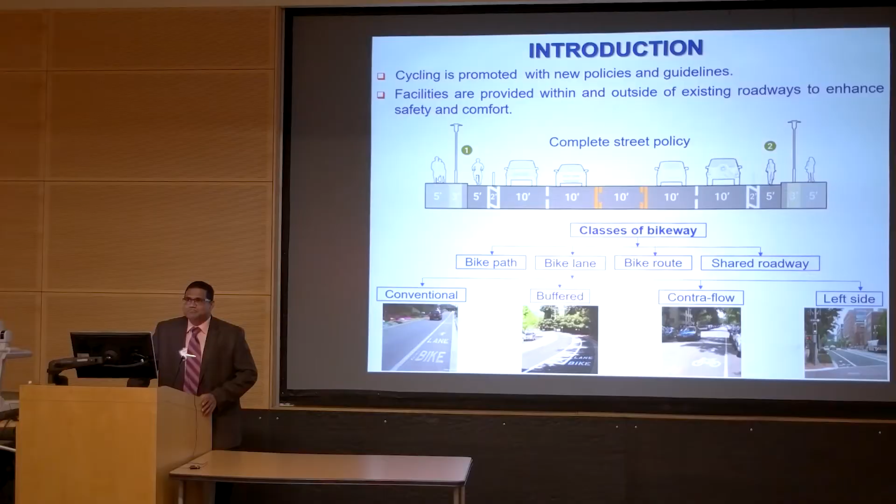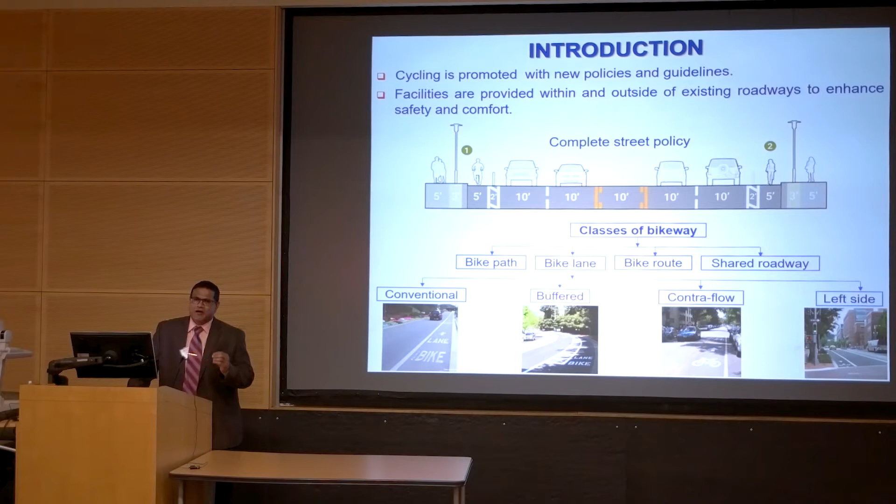The other option is to have a separate bike path. In that case, we have a little more flexibility in designing the roadway width, the curve, the transition curve, and slopes, all to control the stability of the bicycle and also improve the rider comfort. That's actually the focus of our work: to evaluate the impact of roadway design parameters on bicycle stability and the comfort of the rider.

Right now, if we look at how people are evaluating this, they do surveys, they take video recordings to understand how bicycle riders are responding to different obstacles, different curves, or roadway design parameters, as well as how drivers are responding to the bicycle. These are great tools, but they need a lot of resources.

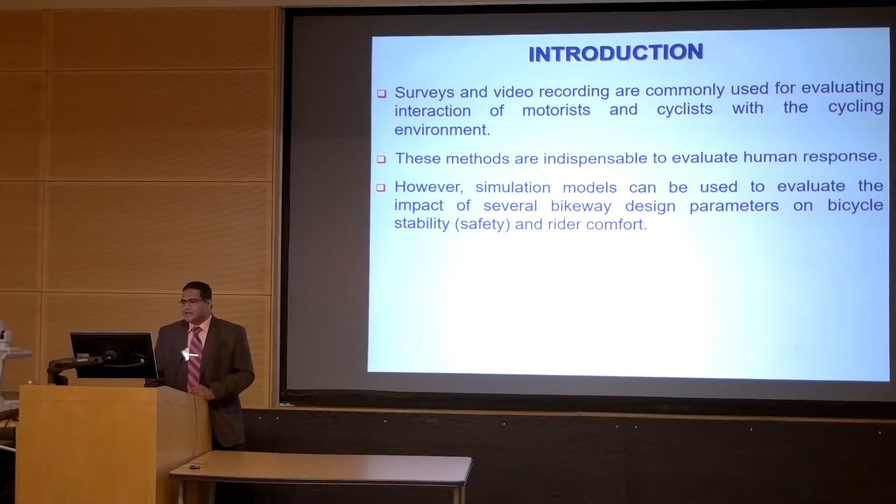So our thinking was: can we develop computer simulation models to get a bicycle traveling along a predefined path, and try to understand what forces develop in the system and how to make the bicycle stable? What is the stable velocity for a given road configuration? As you go from a straight roadway into a curve, what forces develop and how do they make the rider comfortable or uncomfortable? That's the focus.

This idea came up mainly because I worked with Dr. Kyle several years ago developing vehicle models. We developed complete vehicle models like Hummers, flatbed trailers, and semi trailers. I was developing the model, and Dr. Kyle, who is an expert in vehicle dynamics, was simulating these vehicles on different road profiles to understand their stability.

As you drive around a curve, what is the minimum curve that will cause the wheels to lift? We were also doing durability studies, running vehicles on different road surface conditions to understand the stresses and strains developed in components, to find out how long these components would survive under these road conditions.

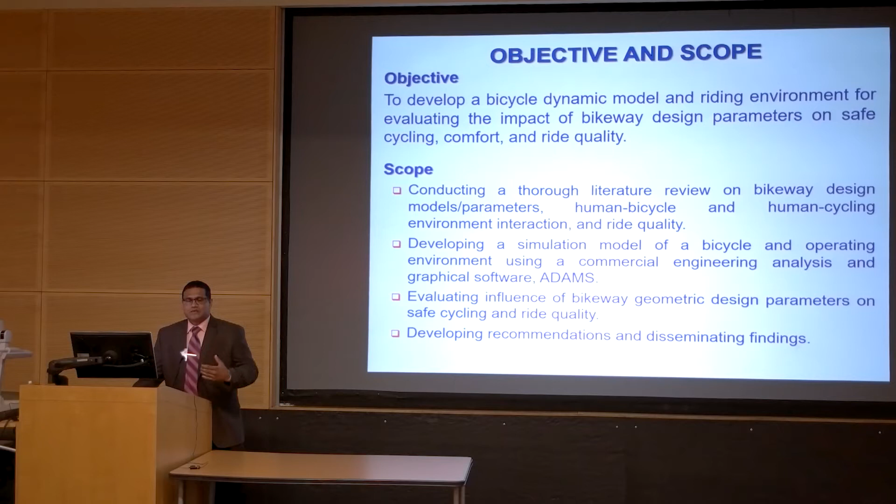With that background, we thought: why can't we develop a bicycle model and evaluate the impact of design parameters on the stability and comfort of the ride? We did a thorough literature review to understand the state of practice and state of the art, then worked with specific software to develop the bicycle model. We evaluated the impact of these parameters on stability and rider comfort, and based on that, we are proposing recommendations to move forward with this research.

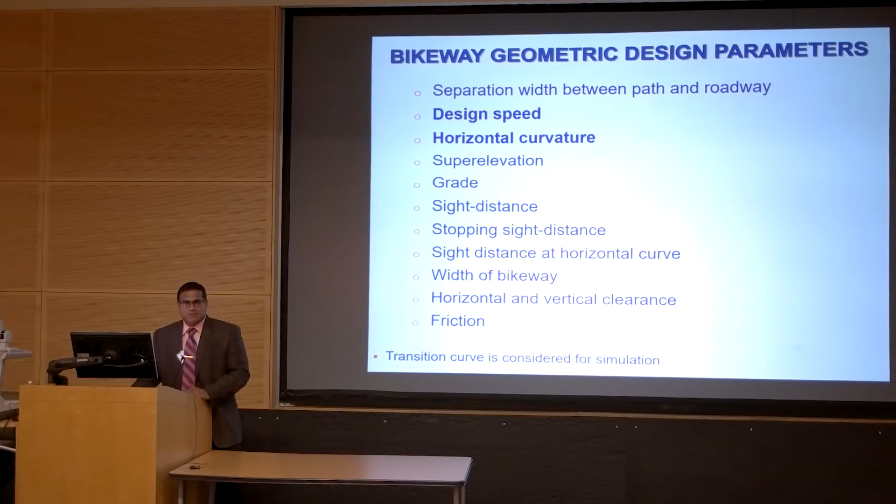There are many different parameters to consider for bike path or bikeway design. For this study, we looked at design speed, horizontal curve radius or curvature, possibly including friction, and also the impact of transition curves—as we enter the main curve, how we can use the transition curve to minimize forces and discomfort.

If you look at someone riding a bicycle on a horizontal surface with a curve, it develops several forces. One is the body weight plus bicycle weight acting toward the ground. Another force is the centrifugal force that acts outward from the curve, normally toward the center of gravity. In addition, forces develop at the road and bicycle tire interface—you have a normal force and a friction force. Combined, these produce a resultant force that passes through the center of gravity.

So those who have done basic statics will know that if we have three forces that pass through a point, you can represent that with a closed triangle. If you can make that triangle closed, that means the system is in equilibrium. In order for that to happen, we have what we call the lean angle. By looking at all the forces developed, we can calculate what the lean angle is with respect to velocity and radius to make this bicycle stable.

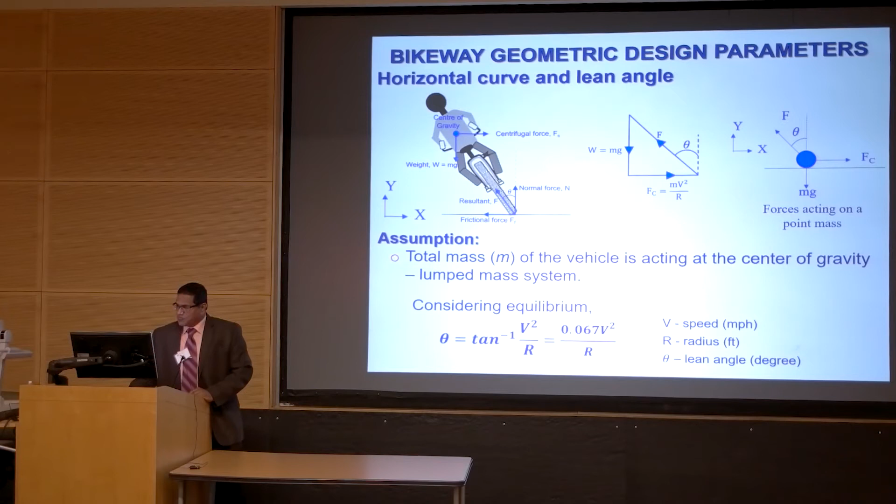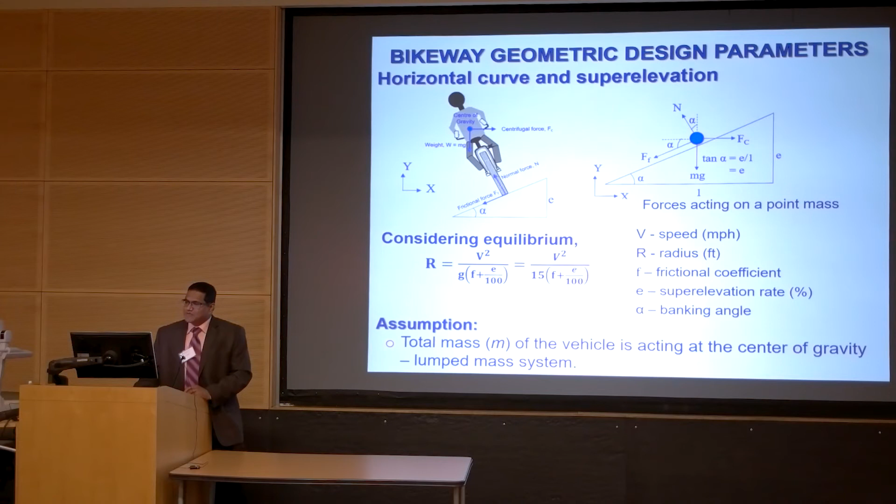If you are riding on a road with a super elevation, we also can look at the influence parameters: velocity, friction, super elevation rate, and gravitational acceleration. With all these forces involved, we know the equations and the parameters, but our focus is including a limited number of parameters for the analysis. There are limitations that I'm going to discuss later.

With our approach, we use the horizontal curvature, radius, speed, and transition curves, in addition to the forces developed in the system. Our simulation right now is with the horizontal curve on a flat road.

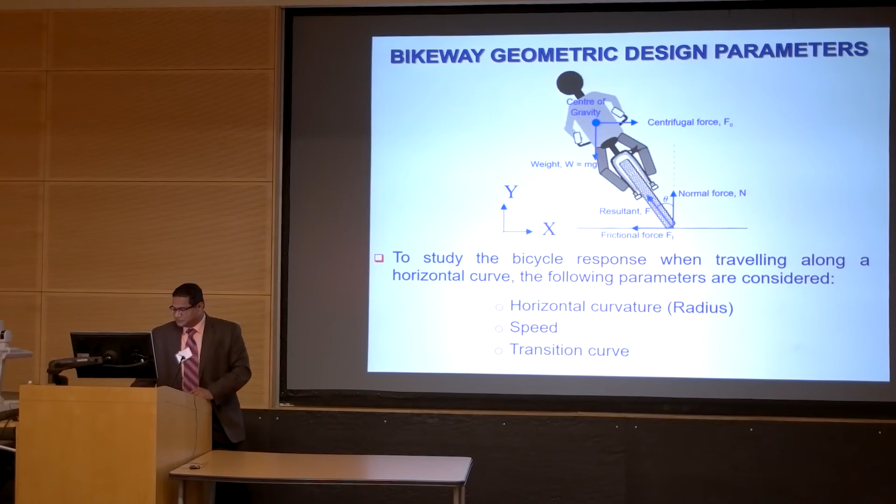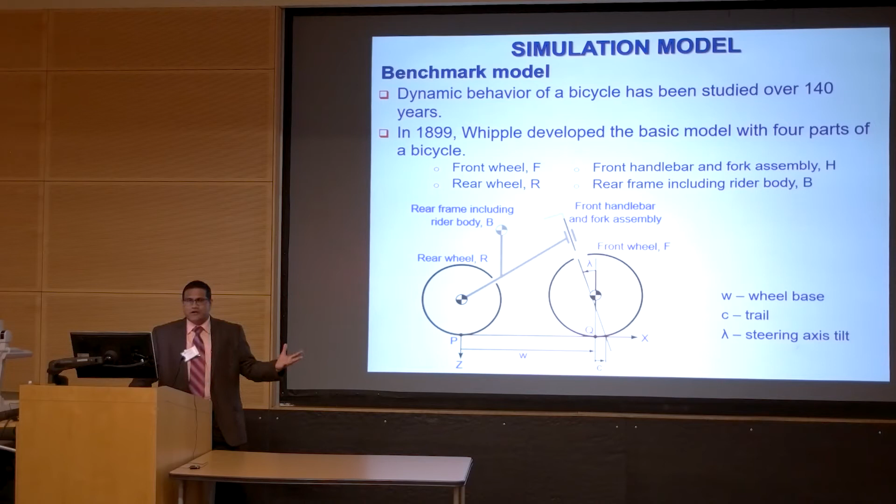So we developed the bicycle model, but developing a bicycle model has a long history - it has been done more than a century ago. People developed this model in 1899, which has four components: front wheel, rear frame with the rider's mass, and the front handle and axles. We were planning to incorporate this, and also look at the recent developments.

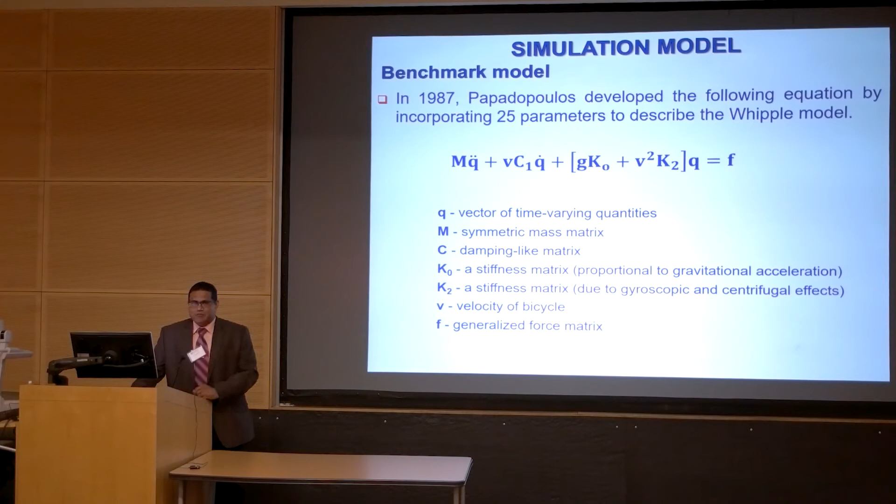People developed the basic model, and it was updated by incorporating additional parameters in 1987 - I call it the Papadopoulos model. So now we have the dynamic model with all these parameters, listed in a table - there are about 25 different parameters.

We can calculate the stable velocity region for a bicycle. As you've ridden bicycles, you know that at a slow speed you go through a kind of weave mode, and if you don't balance you're going to fall down. If you ride at a very high speed, you may feel it's stable, but after a certain speed it will start shaking and you lose stability. So that's what we are showing here.

So you can calculate the self-stability velocity region. These are used to validate our model - we try to use the existing parameters and the fundamental model to validate our model.

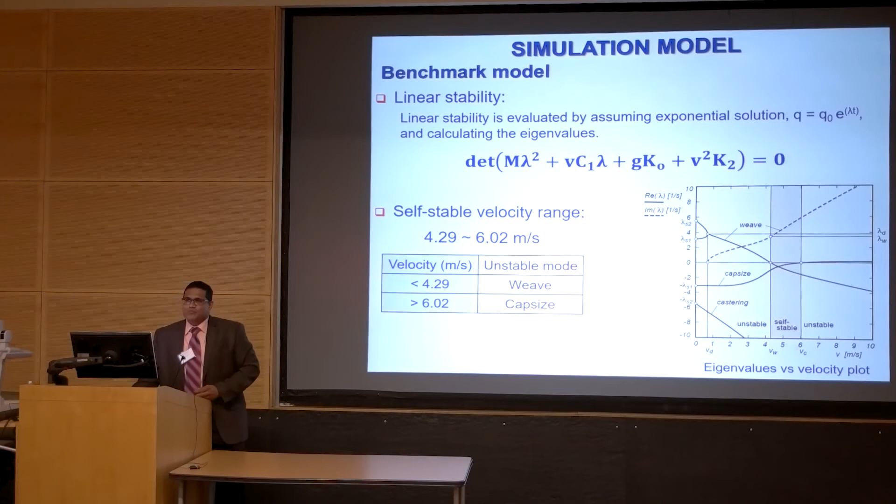So what we did in the computer, we developed this model. It again has two wheels, a rear frame, and the front fork and handle. The difference between this model and a typical analytical model is this one has distributed mass, except the rider - all the components are modeled with their mass and material properties.

In order to control the stability, right now we have constrained the points of the wheel that touches the curve, so that we can allow this bicycle to follow a predefined curve. After we were successful with that, we removed the constraint provided at the rear wheel, and we were trying to find out, as you ride the bicycle, when the rear wheel is going to slip out along the plane. That's where we can introduce friction and try to understand its impact.

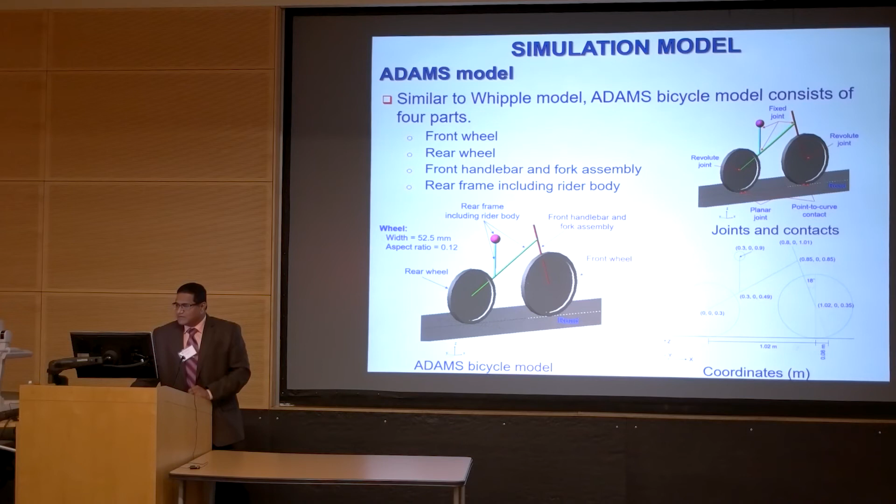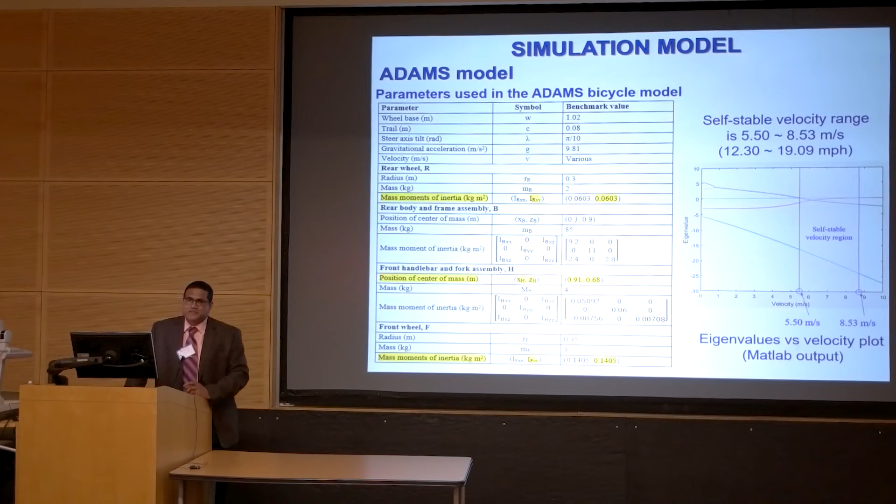So we developed the model in the computer, but we didn't have all the parameters available in literature. Based on the geometry we developed, we had to modify some of the parameters, which changed the stable velocity region we calculated. So we recalculated them based on the parameters already included in the model.

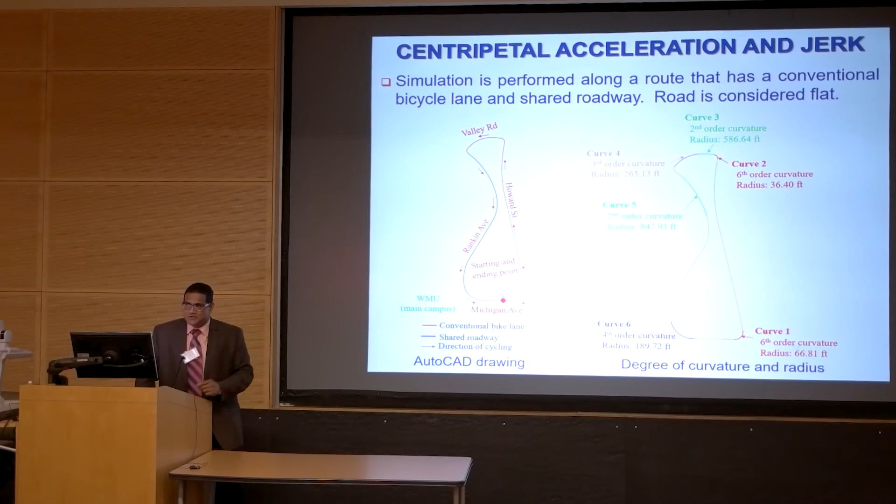After that, we wanted to simulate this bicycle's movement along a predefined curve. TRCLC has an instrumented bicycle, and they collected a lot of data by allowing people to ride on this path. So what we did was go to Google, get the map, and start fitting a curve for this route. That gave us the straight portions of the road and also the different curves with different degrees of curvature. We input that into the computer model and tried to get the bicycle following this path to understand what forces are going to develop in the system.

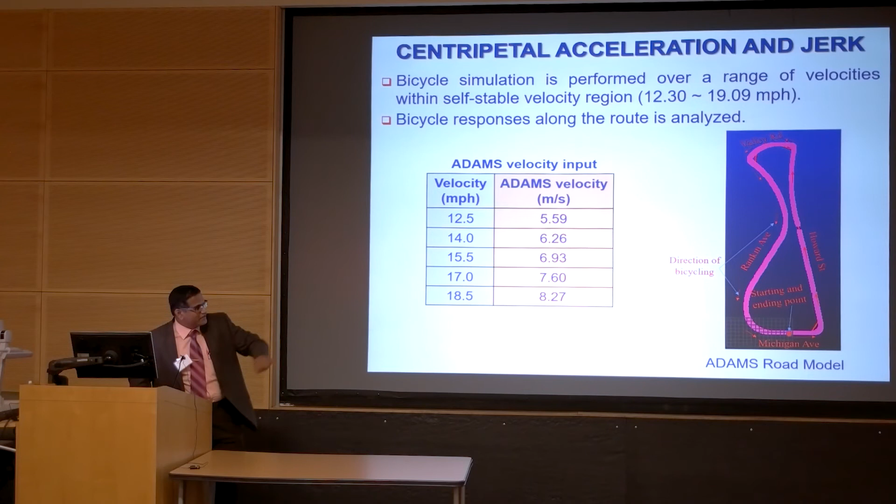So this is showing how it was integrated into the computer, and then we were running the bicycle model, getting the bicycle moving at different velocities within the stable region. The thick line is showing the real path defined in the computer model. Then there are some small straight lines, those are just graphical kinks, we can say.

So now you see this straight part, that's just graphics. But if you simulate the bicycle, it's going to follow the real curve. So you may see it going out from that straight path because the real curve is this one. So the bicycle is following that curve. The other one is just a graphical issue.

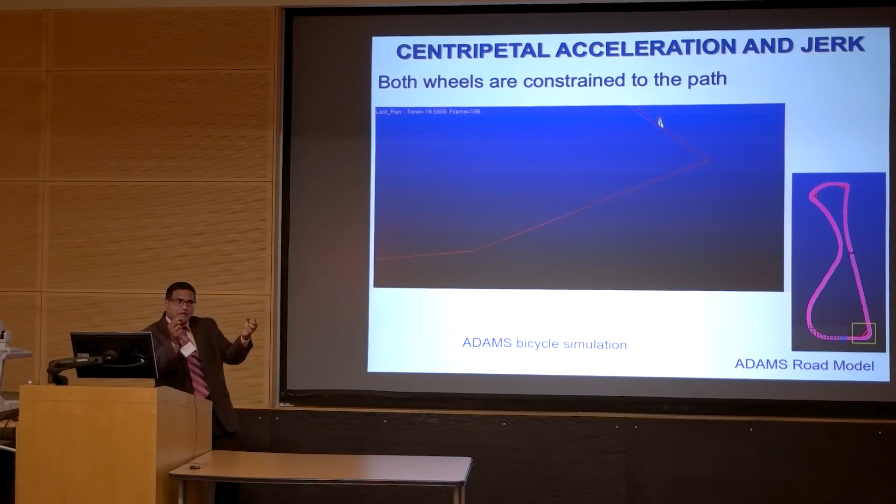So now we have the complete model developed, so we can simulate it following the curve. Even though it looks like it's going out, it's really not going out - it's following the predefined path. In this particular case, we left the rear wheel and front wheel both constrained to follow the predefined curve, so there's no slip because both wheels have to follow the same path.

So next stage, we released the rear wheel and got the bicycle to follow the same path. As you can see, as the bicycle enters the curve, you'll see some slip in the rear wheel. And as it exits the curve and gets into the next part of the road, you'll see some slip happening at the rear wheel. This is showing the position and the slip angle of the rear wheel. So we were successful in doing this.

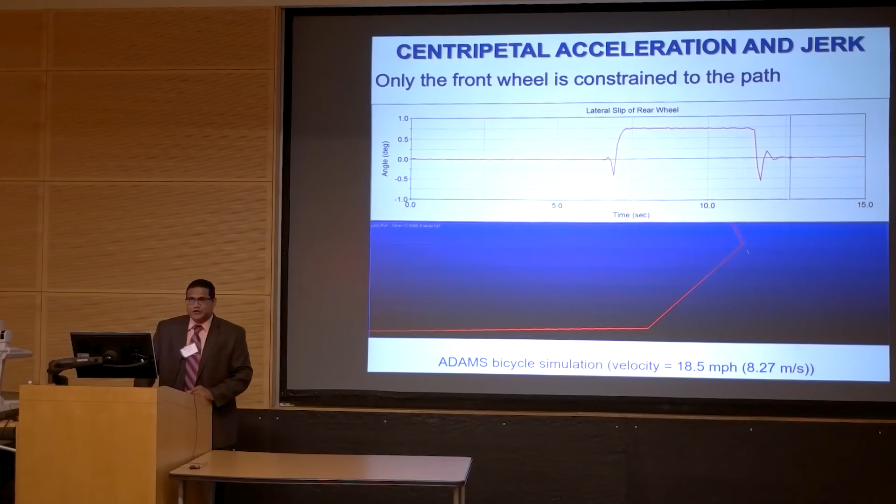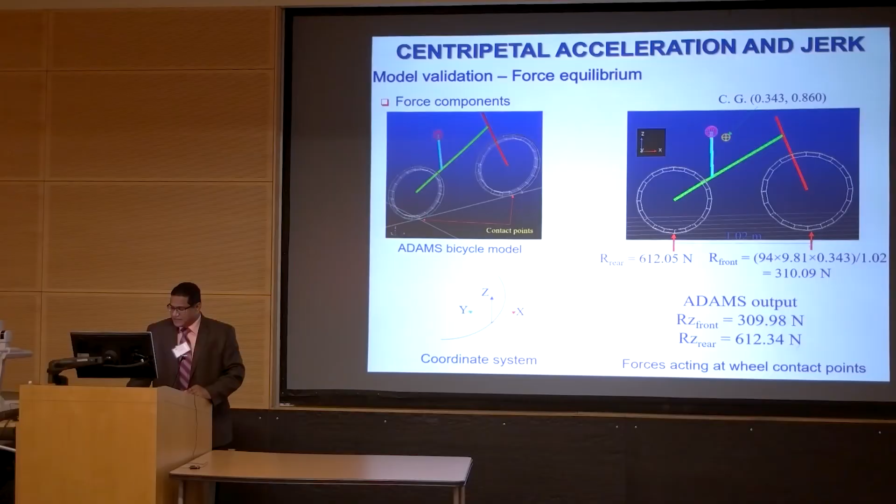But the results that I'm going to present to you are only coming from the first model, where we had both wheels constrained to the path. So initially we verified all the loads acting on the wheels as a verification process. And this is what you're going to see.

What you see here, we have the centripetal acceleration as the vertical axis and time as the horizontal axis. So as the bicycle travels along different curves, we can measure the centripetal acceleration. As you can see, in certain cases it's a little higher, and in some other cases it's lower. So it depends on the curvature, and this has a constant velocity - so it's basically based on the degree of curvature.

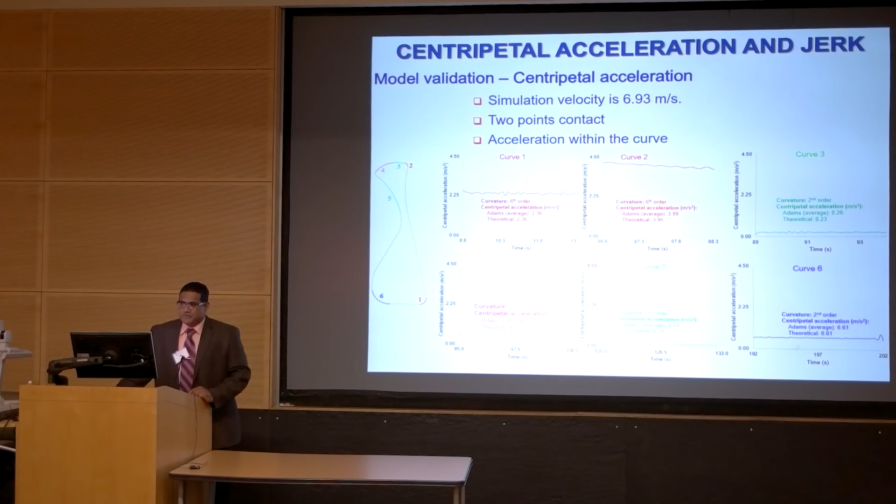After that, we looked at what's going to happen when the bicycle enters the curve and exits the curve. That's where you see the jerk - jerk is the change in acceleration with respect to time. These vertical axes are not on the same scale because we wanted to expand for clarity and show how the jerk changes. So the first curve has a vertical axis maximum of 45, but the last one has a jerk close to 600.

It depends on what is the curve before the real curve - that's not really a transition curve here in the path, but we can say that's a transition curve. So what is the change in curvature between the start and the real curve? Based on that, we can see there's a large jerk acting on the rider, which makes the rider uncomfortable.

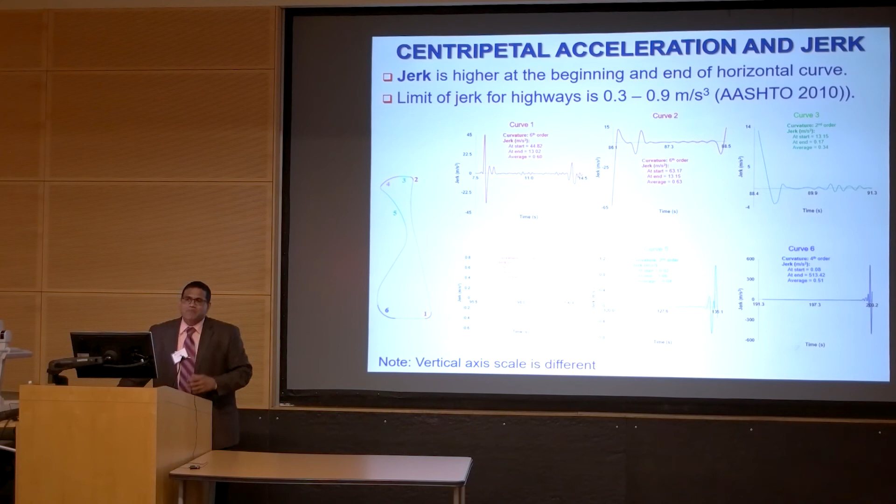So what we did was calculate the length of the transition curve and included that into the model. Now you can see the same curve with the transition curve, you can minimize the jerk acting on the bicycle or the rider. So with this, we can evaluate the impact of these roadway design parameters.

Right now we have limited parameters included, but we are trying to modify the model to have more degrees of freedom released, to even find what is the lean angle - whether we can capture the lean angle, and how we can use this.

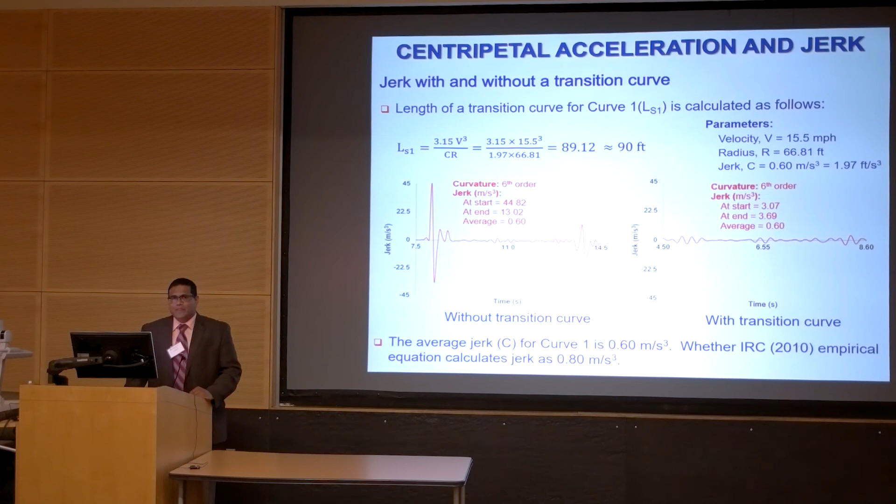I'm going to skip some of the slides. So how can we use it? If we have an existing road and we want to incorporate a bicycle lane, we can take the parameters and try to find out how that will impact, or what is the influence of those parameters for the stability of the bicycle and the rider comfort.

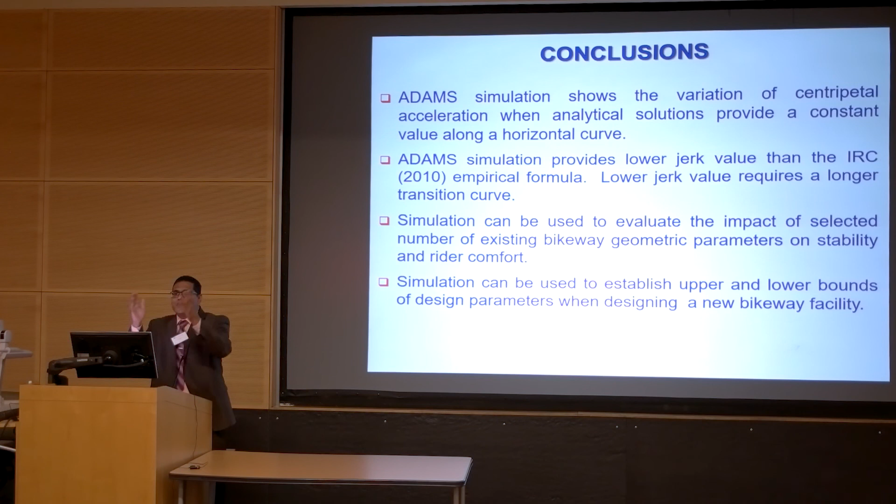If we are going to design a separate path, now we have the flexibility to change the parameters, so we can evaluate lower bound and upper bound values and try to stick with that. Right now we have a couple of limitations in the model - tying the wheels to follow the same curve - but we have released the rear wheel and looked at the impact of that on slip.

Most probably we'll be able to incorporate friction. So the next step in our work is really to look at how to fine tune this model to capture roadway design parameters' impact on the stability and the rider comfort.